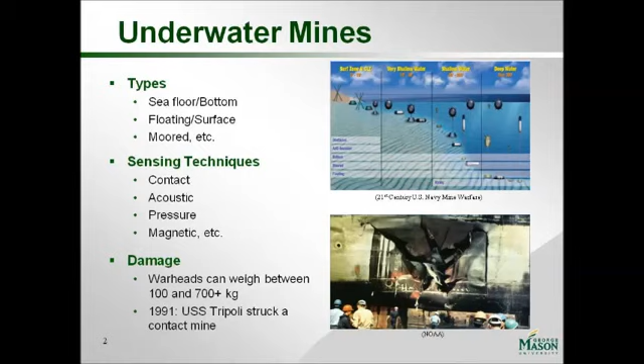Due to the physics of the underwater environment, the best means available today to sense underwater mines are sonar. Sonar sends out sound waves and has a receiver that senses the echoes that come back, and from those sound waves returning to the sonar, it can create a picture of the ocean floor and anything sitting on it. Currently, the Navy uses these sonars by towing them through the water with a manned helicopter.

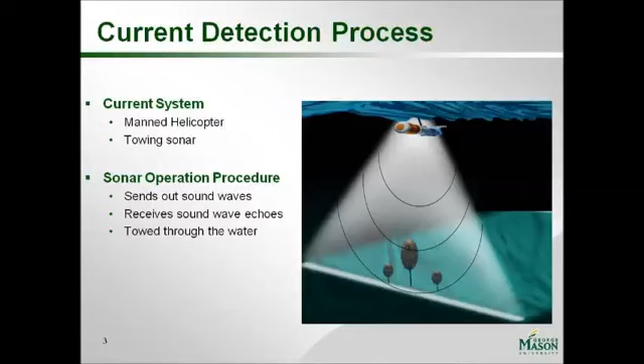The sonar equation displays how a sonar either detects or fails to detect an object underwater. The terms in green work in the sonar's favor, and the terms in red work against the sonar. All terms are measures of sound in decibels. In the end, if the signal excess is greater than 0, the sonar has sensed the object. If the signal excess is below 0, that means the sonar has not detected an object.

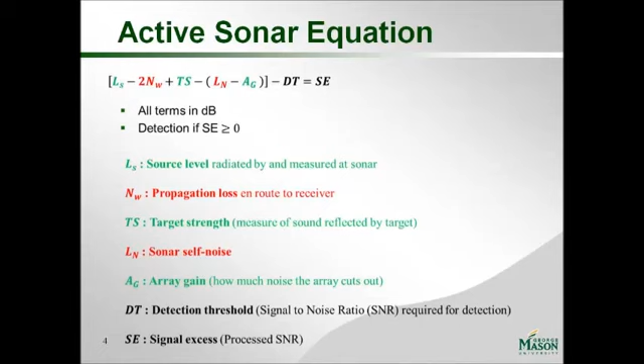According to the Navy, the time required to clear a minefield can be up to 200 times the time required to place the minefield. The cost to lay a minefield can be as low as 0.5% of the cost required to clear the minefield. Therefore, there is a need for the U.S. Navy to improve the effectiveness of its mine clearance systems.

To do this, they must reduce operational cost, increase the rate of detection, and remove the safety risk of its personnel.

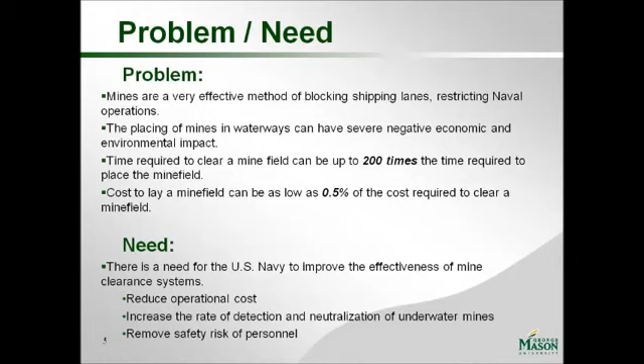To begin the design of a new mine detection system, we came up with 2 sonar alternatives to evaluate. These 2 alternatives vary in size, cost, and capabilities.

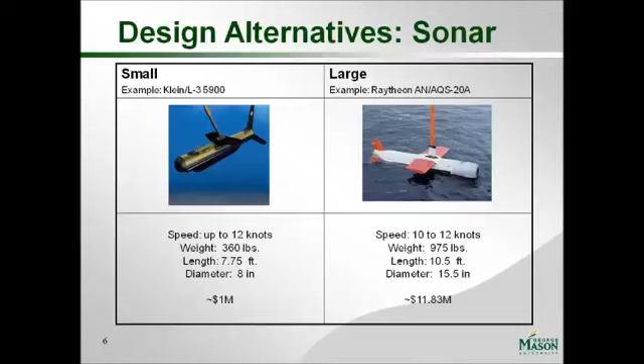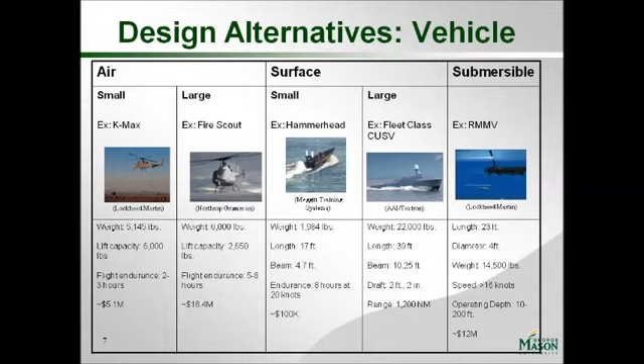We also decided on these 5 alternatives to be evaluated for the vehicle portion of the system: 2 air alternatives, 2 surface boat alternatives, and 1 underwater alternative. All 5 of these vehicles are unmanned. They're able to travel pre-programmed routes through the use of their GPS, and they're all able to tow heavy loads.

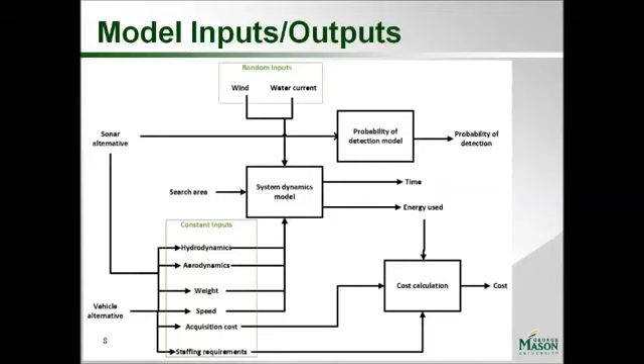This diagram shows the major inputs and outputs to our simulation. The inputs are sonar and vehicle alternatives, search area, and random weather inputs. The outputs are probability of detection, time, and cost. This is all achieved through the use of the probability of detection model and a system dynamics model.

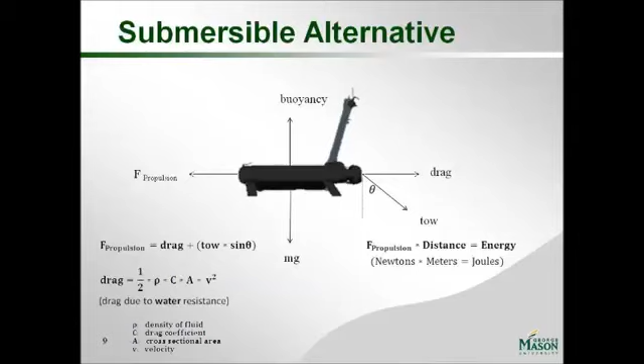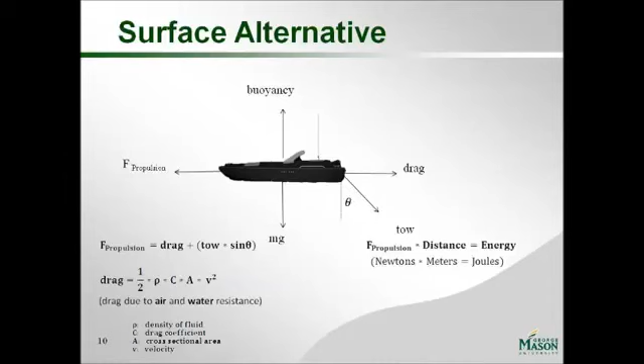The forces acting on the surface alternative are very similar, with the main difference being that drag can be either due to air for the portion of the boat that's above the surface, or due to water for the portion below the surface. Forces acting on the airborne alternative are different because of the lift required to keep the helicopter in the air.

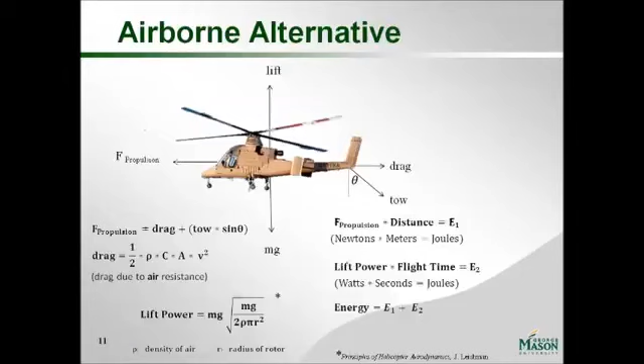The lift equation is shown on the bottom left-hand side. The energy used to keep the helicopter in the air is added to the energy used to propel the helicopter forward to come up with the total energy used. After total energy is calculated, it can be converted to cost by first converting to a volume of fuel using the energy density of the fuel it is using, and then converting volume into cost using fuel prices.

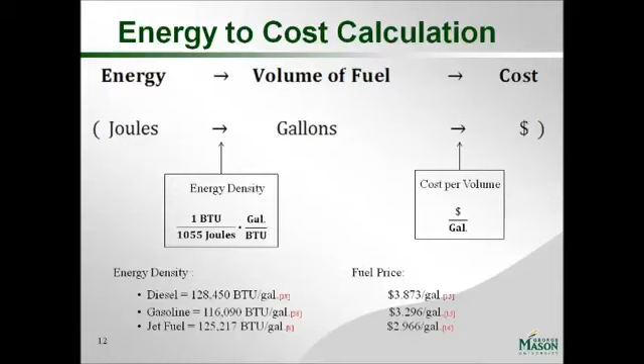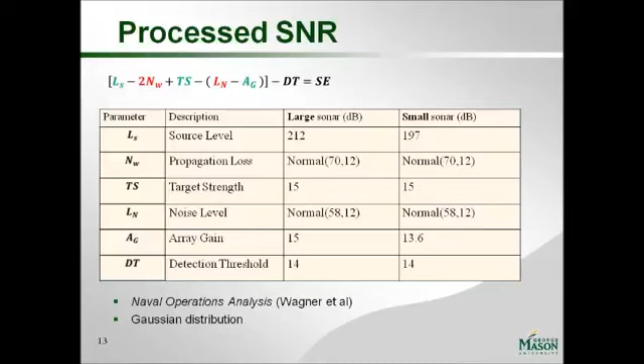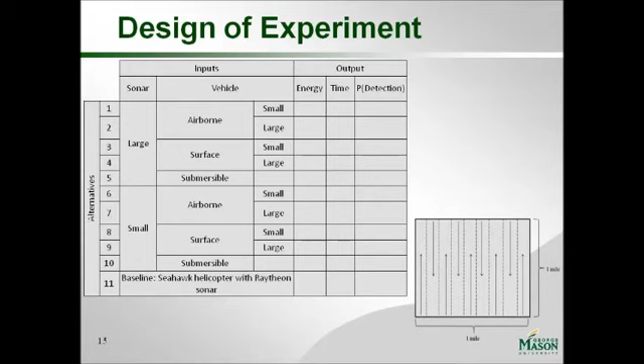Pairing each vehicle alternative with each sonar alternative comes to a total of 10 alternatives to evaluate. The 11th alternative is the current system that the Navy uses. All 11 of these alternatives will be put through our model, traveling in a 1 square mile area in the pattern shown on the bottom right.

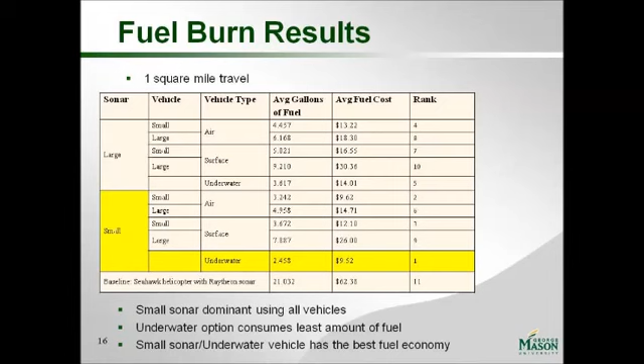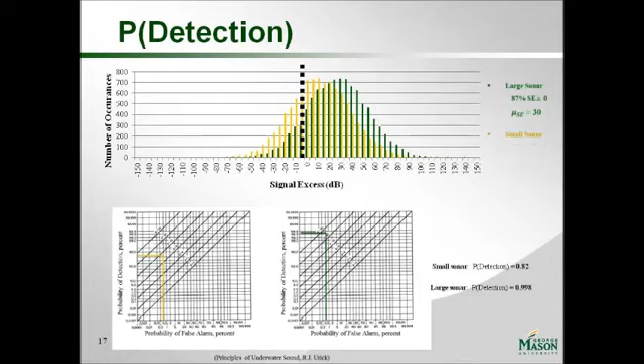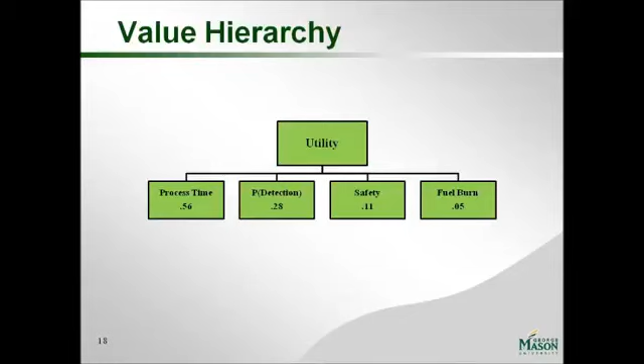This value hierarchy shows the importance of different attributes of a mine detection system. These weights were derived through discussions with industry experts and then using the swing weights method.

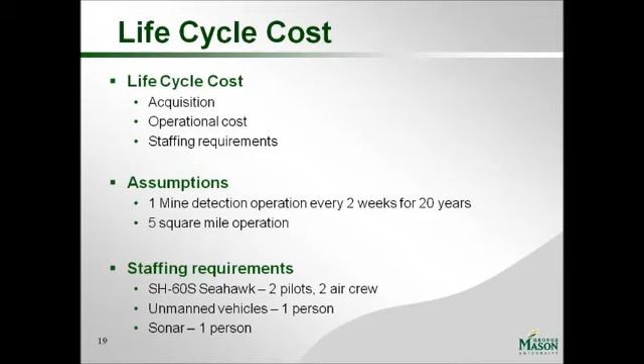Life cycle cost for each alternative was calculated by adding up acquisition costs, operational costs, and staffing costs. Because the Navy does not publish how often they perform different operations, an assumption had to be made. Also shown are staffing requirements for operation of different alternatives.

Plotting the total utility versus cost for all alternatives revealed two clear preferred alternatives circled in green, the top being the large sonar paired with the small boat, and the bottom left the small sonar with the small boat.

Looking at these two alternatives together, we noticed a high difference in cost and a small difference in utility, which led us to the question, can we take the small sonar with the small boat and, because of its low cost, use multiple units at once to try to raise the total utility?

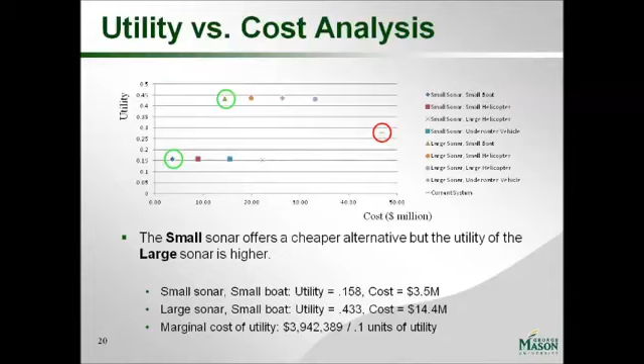This thought process led to the addition of 3 new alternatives to evaluate, all using the small sonar, small boat combination. Starting from the left, the first unit travels its pattern with the second unit directly behind it, increasing the probability of detection. The second new alternative is both units covering the 5 square mile area simultaneously, each cutting the area in half for the other.

And the last new alternative on the right combines both options together, increasing probability of detection and reducing time while using 4 units simultaneously.

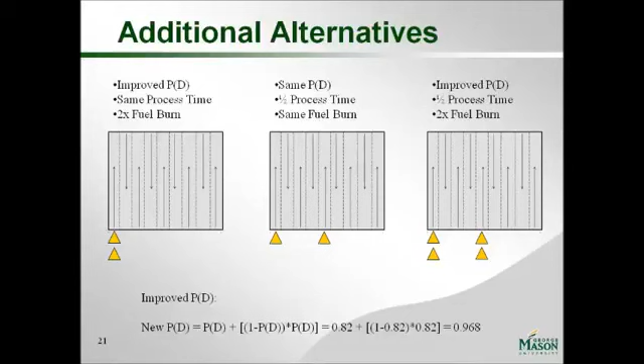Plotting the 3 new alternatives with the 2 previous preferred alternatives and the current baseline system reveals 2 new preferred alternatives, those being the 4 units of the small boat, small sonar combination, and the 2 units of the small sonar, small boat combination traveling in the time emphasis pattern.

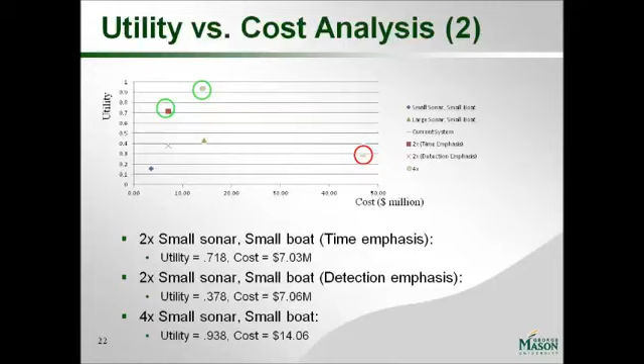Our final recommendation brings 2 choices to the decision maker, either the 2-unit small sonar, small boat combination, which brings the lower cost, or the 4-unit small sonar, small boat combination, which brings a higher utility.

And that concludes our presentation. Thank you for watching.